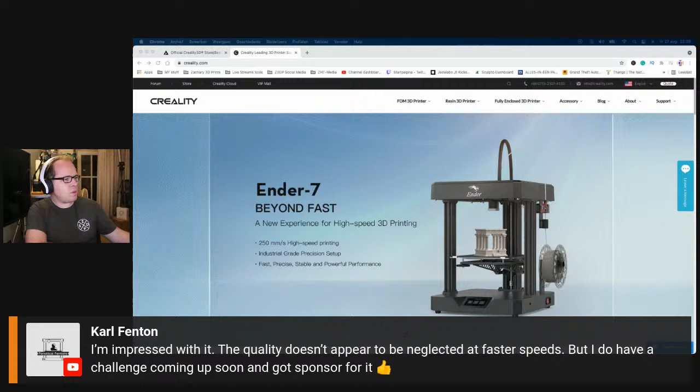I missed something here. Let's put this up. Sorry, let's get back into the firmware. So, supports, downloads, CR series. Just checking on the Ender 6, and the 4, and the 7, and the 6.

I don't understand this. They upgrade, they make some firmware. The latest one is from 6 May. It's only for the screen firmware. So that's not so nice.

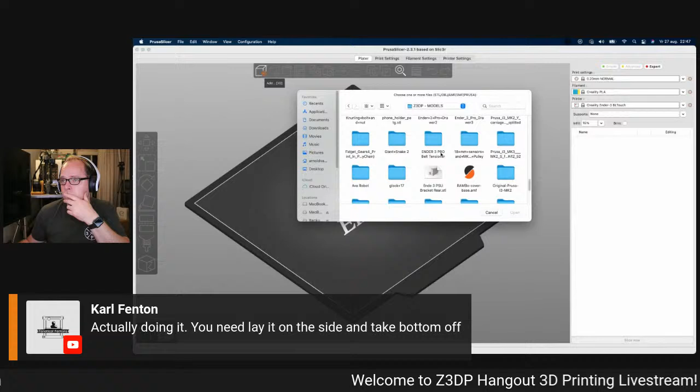So where's this calibration cube, Benchy. Benchy. Auto repair - 1104 errors. Cool.

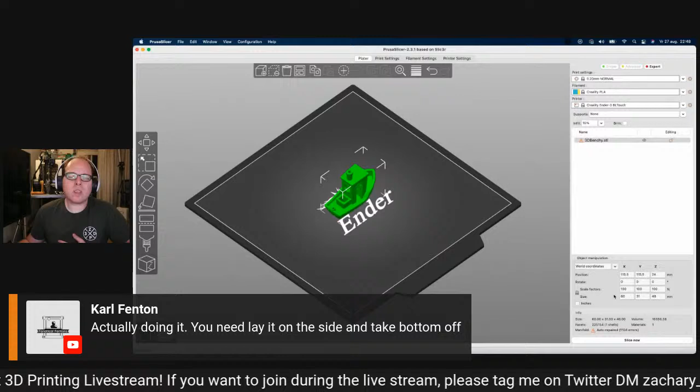A Benchy. So, am I going to use a normal 0.2 layer height on normal? So I want to make the fastest Benchy print. So first I need to make sure to have a brim on, because yeah, indeed there are a lot of errors, but the boat doesn't need to float.

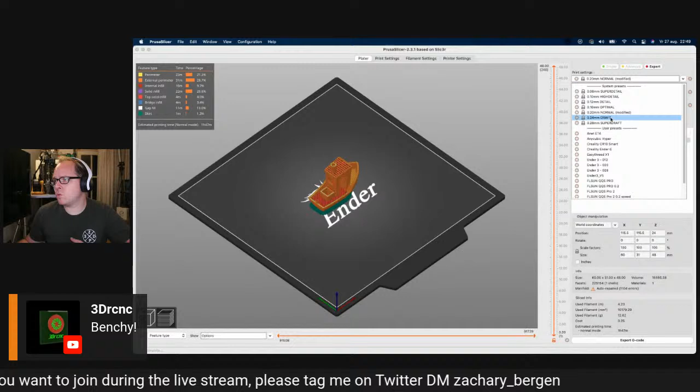Sorry. So if I'm going to slice it now, then it would take me 1 hour and 47 minutes. So, super detail, high detail, detail optimal, normal, draft. No, so I want to have a fast Benchy print. Printer settings.

Just under 4 minutes. You are going to print now in 4 minutes? Print settings. Speed.

Because I selected brim here, brim is skirt and brim are red highlighted, so there's a modification in the quality, normal at 0.2, for under 4 minutes speed record.

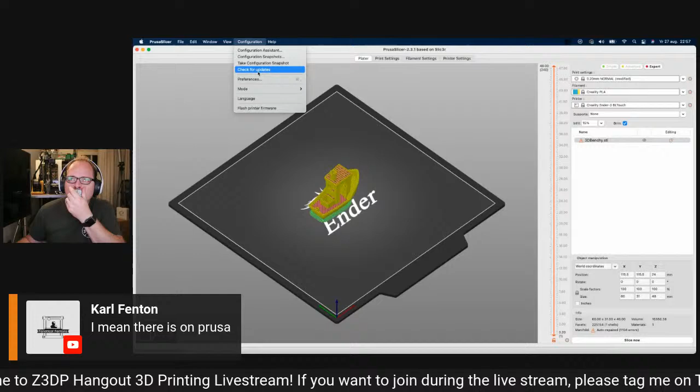Time is relative. Somewhere it's a good morning, somewhere else it's good evening, and in some places it's unknown because we as humans didn't go to Mars yet.

So if I'm... PrusaSlicer says no configuration updates available. Yeah, but I want to know if there's a newer check for updates. So this is 2.3.1.

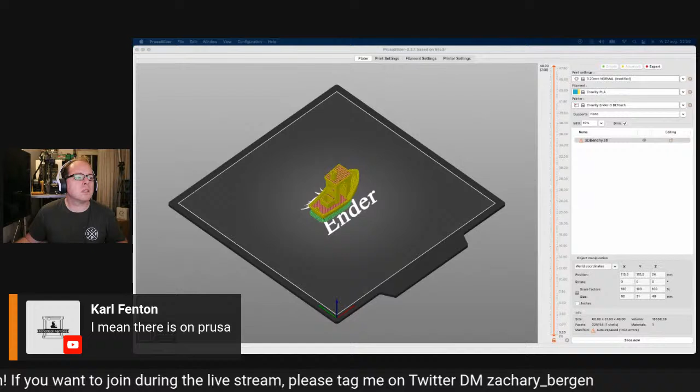3D printer brands, Prusa 3D, software. Oh, software. Drivers, firmware, and manuals. Prusa Slicer. We want to go to Prusa Slicer. Oh, 2.3.3 - that is what I want.

Let's close this one, discard. I don't want to save that. DMG opening. So drag to install.

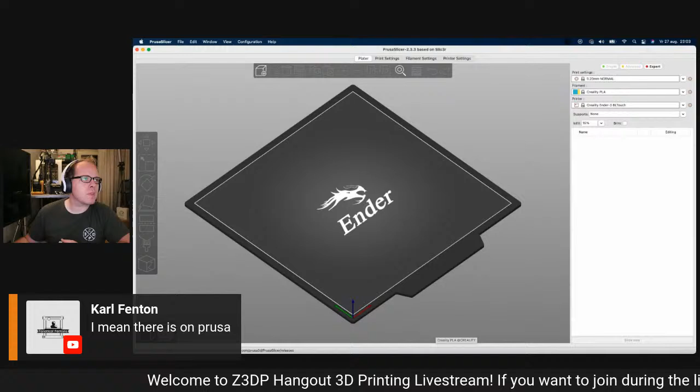Oh, make a Viking. That is insane. Just starting the first prints of your prototype 3D printer.

So we have, I need to check this. Okay, who else had this problem within Prusa Slicer? Just let me know.

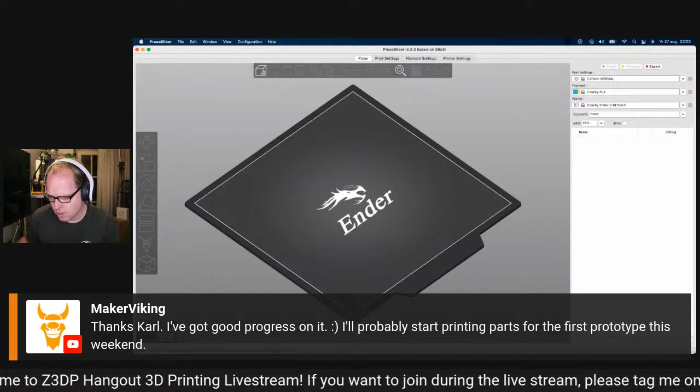So you're going to add another Creality 3D printer. You go into here, you see that these are selected. You're going to deselect it because you are not going to install them again, right? So that is also what I did. I deselected it because I just want to add another printer. I don't want to have those added in there again for the second or third time.

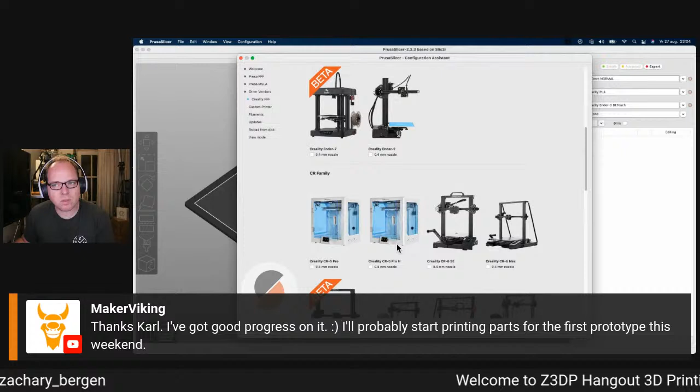So I removed them, and then I was like, hey, Ender 3 profiles. Where are they? That is going to happen if you check these boxes, then those printers will be gone. Makes sense, right? Right. So yeah, the Ender 7 is here as well.

So you are so lucky. Here's the Creality CR-6 Max. We talked about it last Wednesday, 2 days ago.

But what other vendors do they have? I am so very curious. So the FLSun. The thing is, if I am going to deselect this, then my Creality printers are gone too.

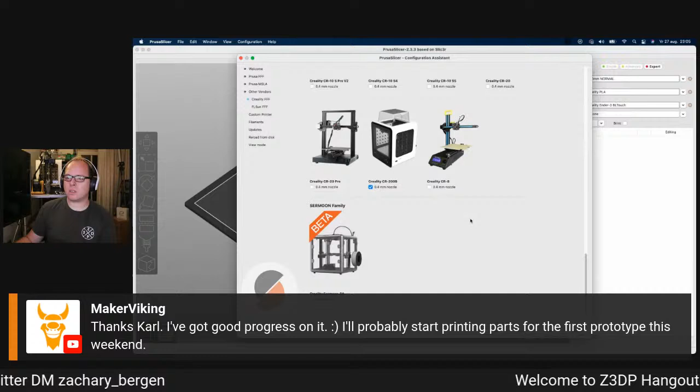Oh, next. Da, Creality Sermoon D1, nice. FLSun QQ-S Pro, very nice. TriLab.

Not me, Zach. I barely use Prusa Slicer. I think you were using more Idea Maker, right?

So, view mode. Okay. So, I'm not going to click on finish because I'm not going to add any other. Yeah, that's what I saw.

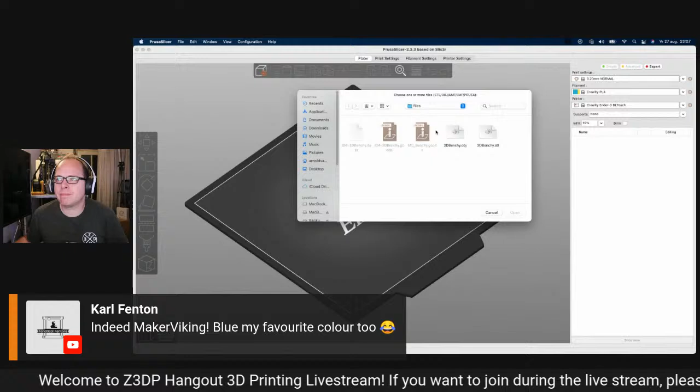Blue is a wonderful color. So again, the Benchy. So nothing changed here, I think.

Auto repair, 1104 errors. Strange, I don't know why, but you know. First slice was 1 hour and 47 minutes. Well, I want, yeah, no, it's going to be set into modified.

So if I'm going to change the print settings, speed, I cannot change anything there. I'm not going to change this. I will do that on the printer. Plater.

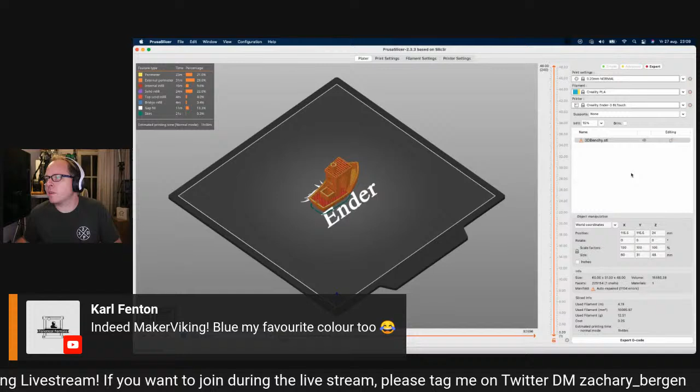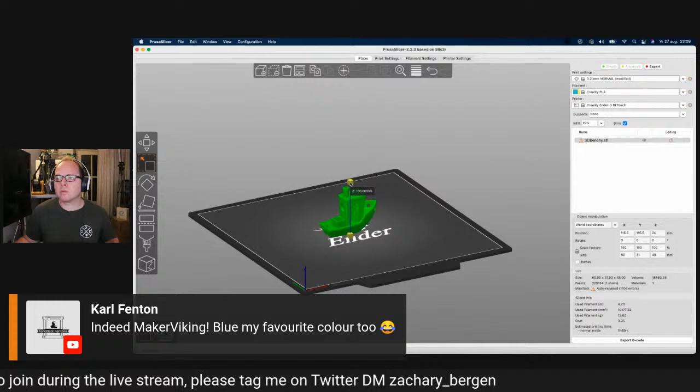No. No. Oh, what am I doing? 50, if I do 50%, it's like no. 29 minutes, so if I go to 30.

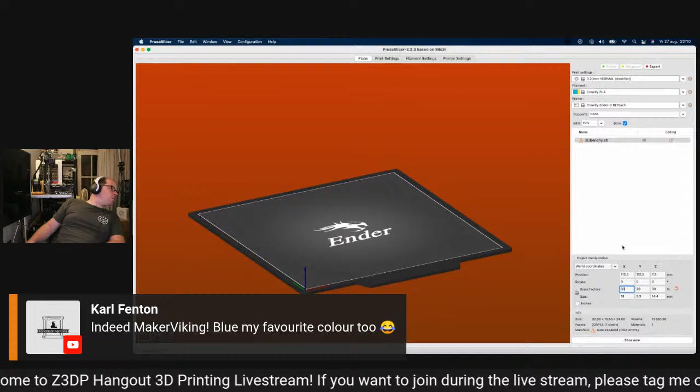Slicing complete. So wait, so if I do 50? Okay, so basically, if I make this 40, so 19 minutes.

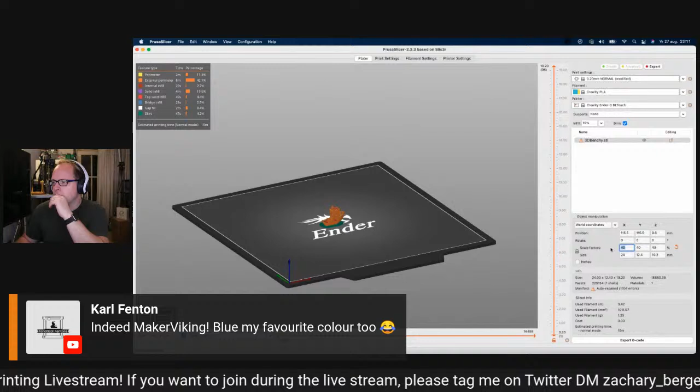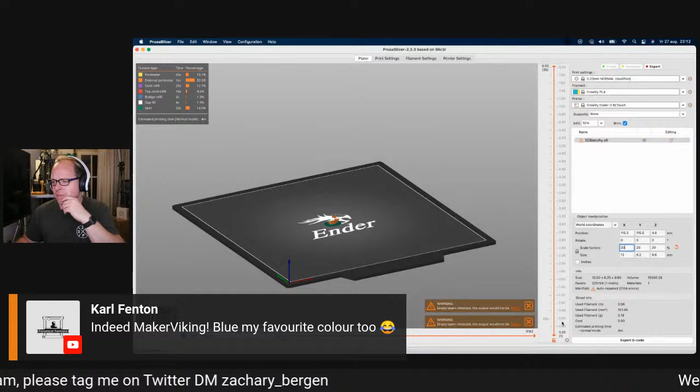So that is real tiny. So if I would manage to get this even sliced, so I have now the problem that it's saying empty layers, and as you can see, the smaller I go, the less things you will see. So...

So no. No. Just undo this. 15.

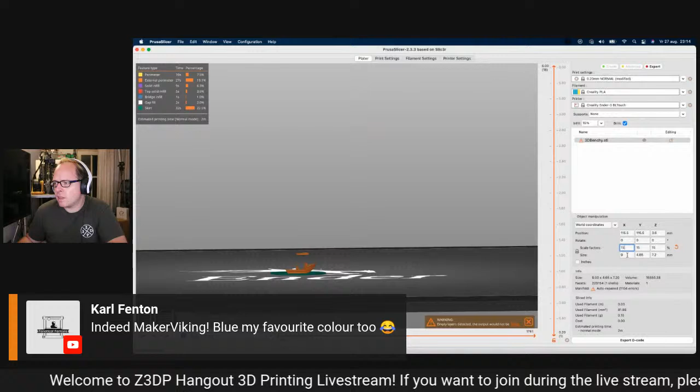So I need to go a little bit bigger. Wait. 2 minutes, so let's go for 20. So 25.

This is usually caused by changing its orientation on the bed. I can do that. Right.

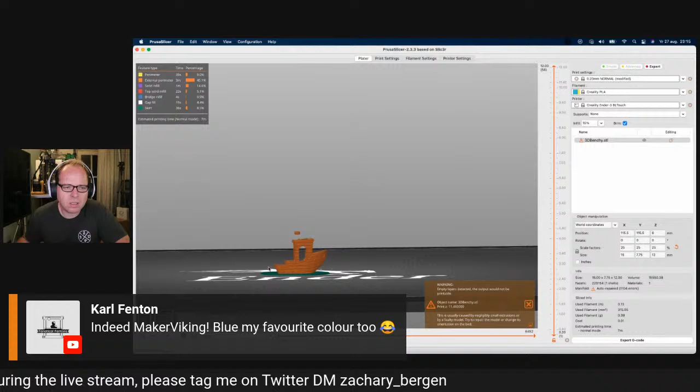No, the small. Yeah, I think that too.

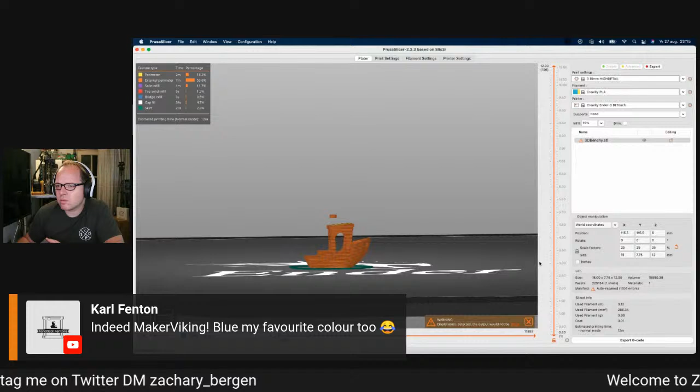Oh, I really would like to try it. But I don't think it's going to look nice. 10 for infill.

How do you use the repair? Never mind.

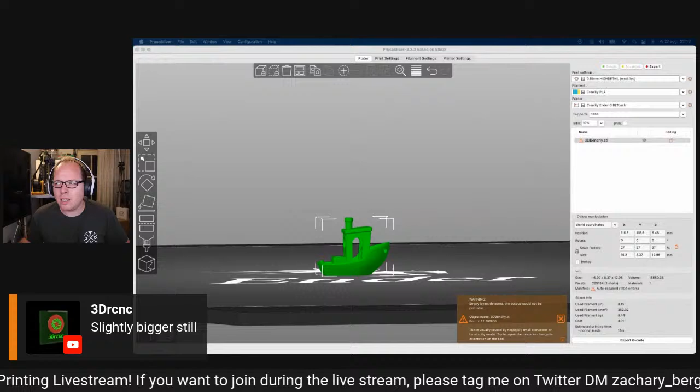Export G-code. So here we have still the issue. I'm just going for 20. Empty layers.

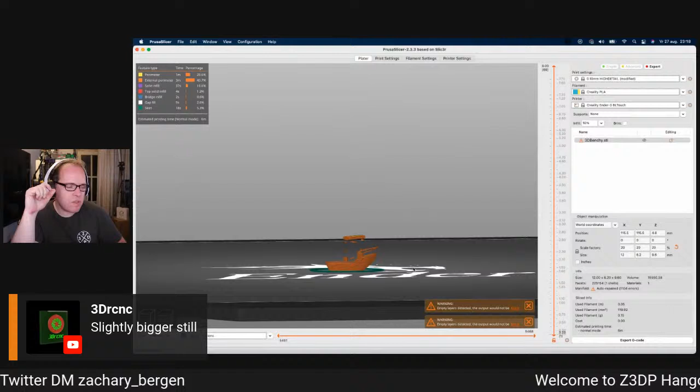I know that I have somewhere nozzles, different kinds of nozzles, and I also think small size, like 0.1, something like that.

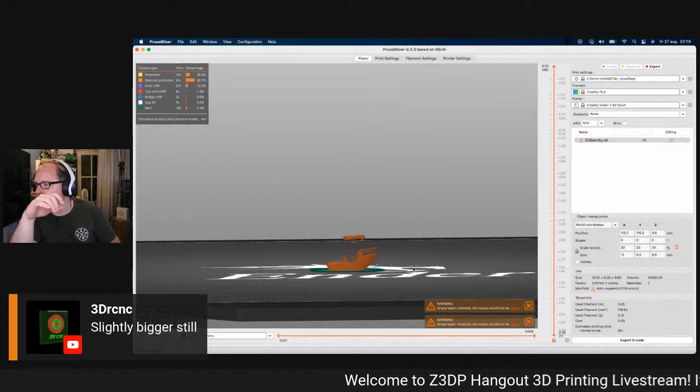So if I would be able to print this, the Benchy would be less than half a centimeter high. No wait, I'm looking at the wrong place. For the height, it's just 1 centimeter high, and in the x-axis it would be 12 millimeters, and the width of the Benchy would be 6 millimeters.

But the thing is, I need to be able to slice it. Maybe if I go to printer settings, extruder, nozzle diameter - if I'm going to change it to 0.2, I do need to think about changing this back afterward.

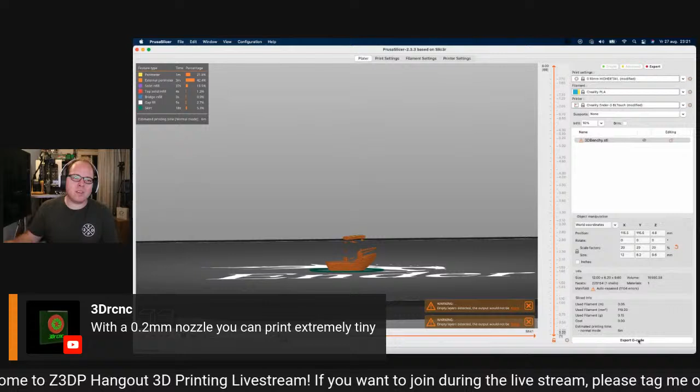If you are wondering what this invisible Benchy is doing on the bed, it's still floating. It's thinking about going a little bit bigger or a little bit smaller, but the smaller I go, the less visible it's going to be.

Zero. Do I need to check if I have those? Does it change the printer settings, layers and parameters? Layer height 0.1, first layer height 0.2. Yeah.

Speed, really fast. Oh, that would also be possible.

Something like that. Then I go a little bit bigger, 30. Slice now. Oh yeah.

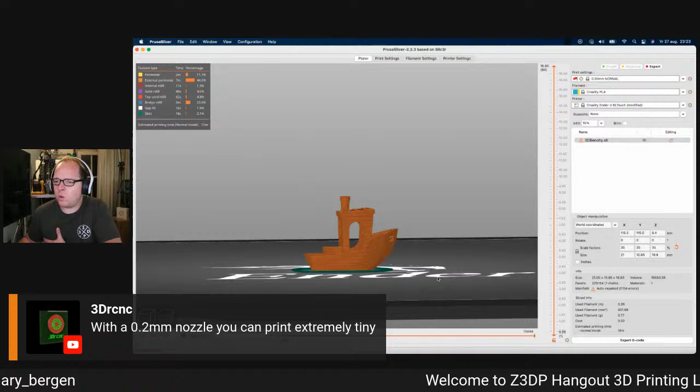This card, slice now. So 35. Slice now. Okay, so there the whole Benchy is there without any issues so far.

Slice now. Printer setting, nozzle is going to be changed to 0.4.

Hey, the boat is gone. It floated away.

So 14 minutes, 14. No, I want to have 80. And first layer is 40 millimeters per second. The rest I'm not sure. Maximum printing speed, auto speed, advanced - what does that mean?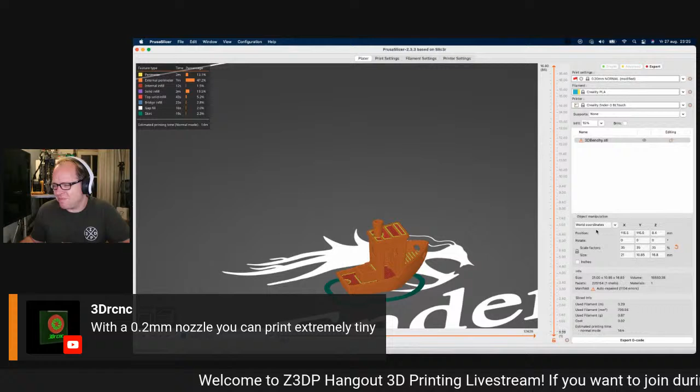I have enough filament there. I'm so - a 3DBenchy printed in a very short time.

It's the first time I printed a Benchy, 2 days ago. Yeah, really, 2 days. I have so many Benchies.

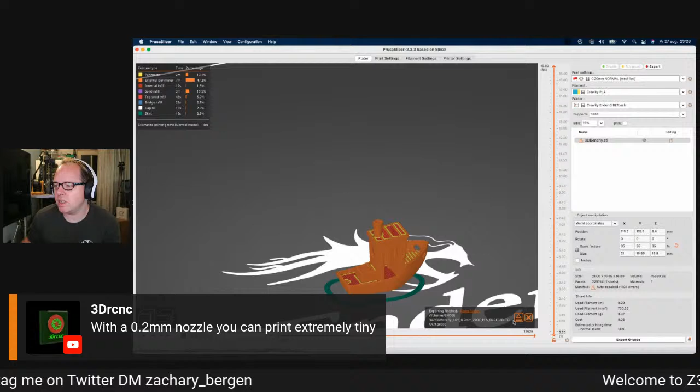So exporting finished. Do I want to do something here? Yeah, I will leave it there, waiting till I get the notification that it is successfully unmounted.

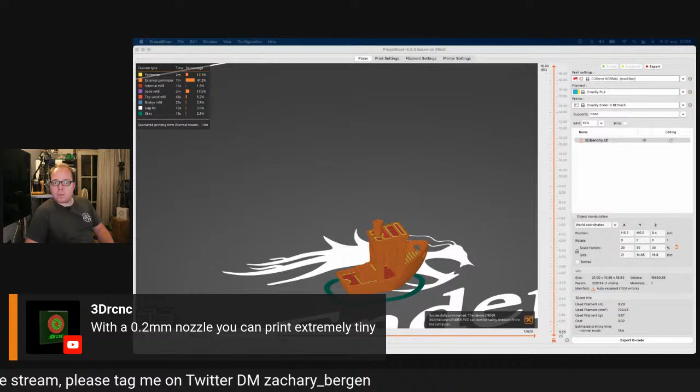So let's fire up the printer and see what is going to happen. 14 minutes.

So let's make some light. Wait. Wait.

3 current viewers? Really? Okay.

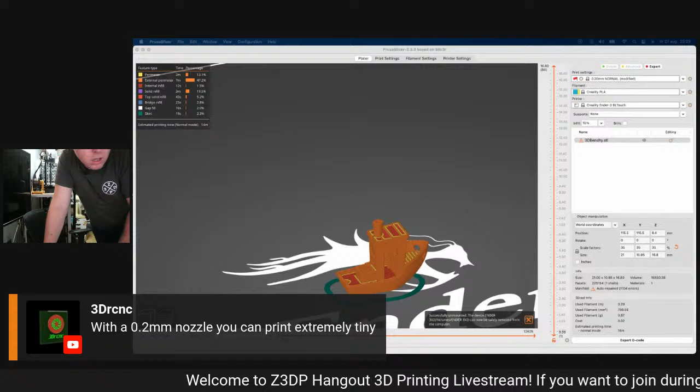So I'm going to heat up the printer. So this is the profile from the Ender 3 Pro V2.

Yeah, I need to vacuum clean here.

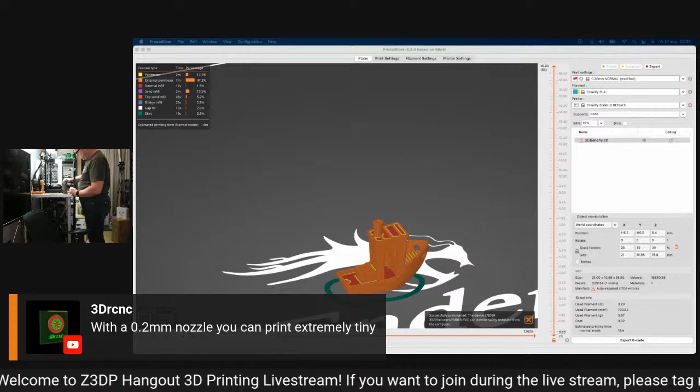Who's still in the chat? Because I don't see that much people. Prepare, preheat - so we are going to preheat with the temperature for PLA. Okay.

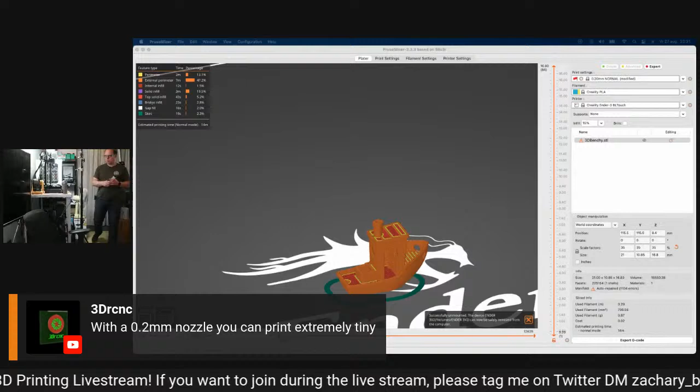This will be interesting as well. Yes.

Burn the wheels off, wow. That could be possible.

So who's all in the chat? Because YouTube says there are only 3 people watching. So Anna, 3D Chris, I think Carl is also still there, so that makes 4. I know buddy, I know. Oh, current viewers too, more people left.

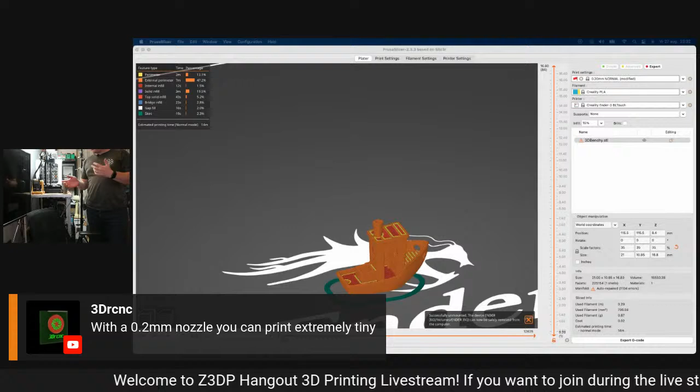I'm going to do a 3D speed Benchy. But the funny thing is, I'm scaling down a Benchy to print it fast on a big printer. Makes no sense, right?

Beep, beep, beep, beep, beep, beep, beep. Press apply. Bum, bum, bum, bum, bum, bum, bum, bum. Whoop. Something like that. So, then it smells a little bit like cherry. Sorry.

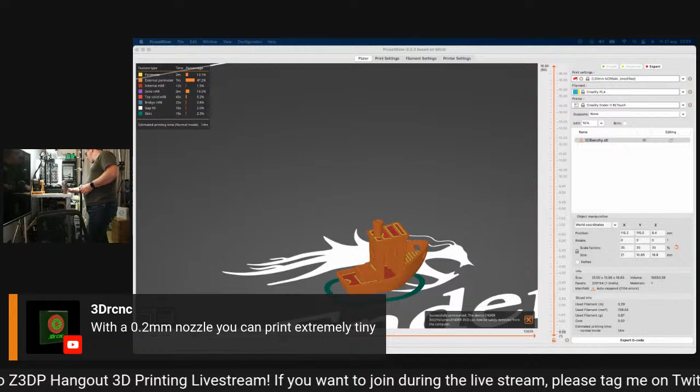Down. Tools, move axis.

Oh, that's a good idea. Yeah. Yeah, 3 people.

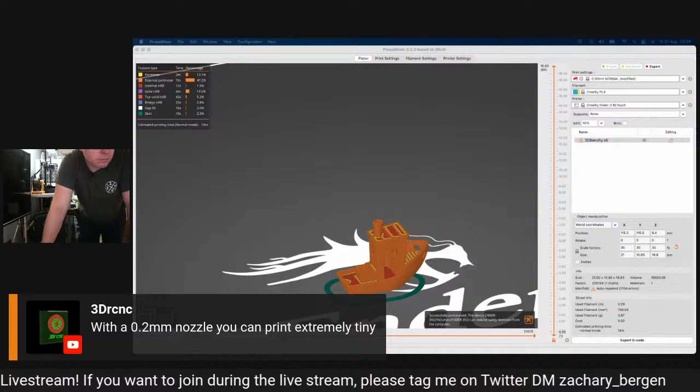And so it's also the same for Streamyard, but that I'm not going to refresh. Print, Benchy.

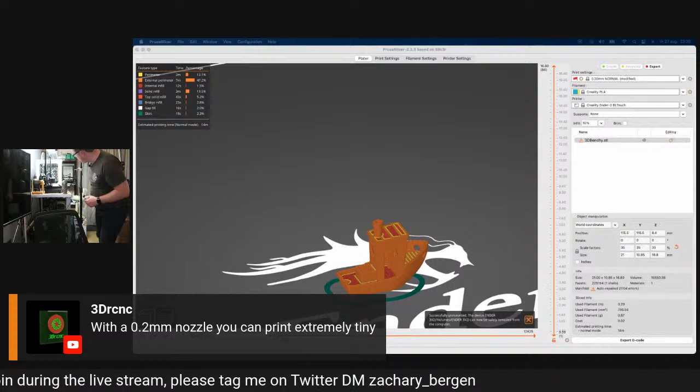So it did do homing. So print. So first we are getting the ABL process, procedure, process thing, no. I don't know what you're thinking. So I go out for a little help.

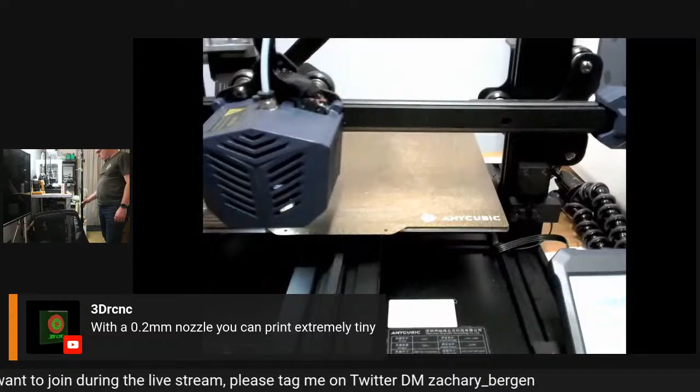Yeah, the webcam isn't that great. Well, we know that, it's a cheap webcam. Still was quite expensive though.

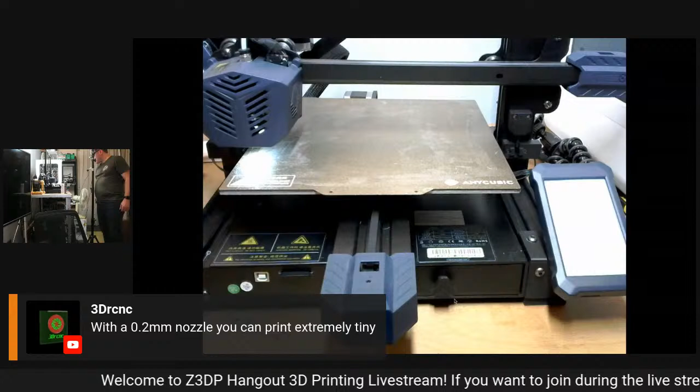So I need to take a stopwatch. And what I'm also going to do is see if I can do something with the print rate. Is that the print rate? Why do they call it print rate anyways?

That will work. Ah yeah. The time is also only 34 minutes streaming for me, it's 1 hour and 36 minutes streaming.

I do need to say the profile from the Ender 3 BLTouch isn't as perfect as you would expect. This is the profile that I use on the Anycubic Vyper. But I do need to say Prusa Slicer for the ABL probing does amazing. It's under 50 degrees, not at the melting point for the PLA in this case, so you don't get those little tiny dots on the bed that you would get if you are heating it up to 210 degrees. Because I did that, and every single time you would see those little pointy things on the bed.

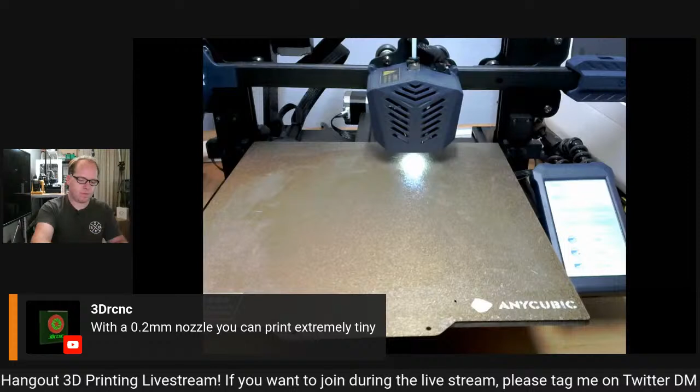Streamyard told me it's showtime, so I started the countdown. I do need to say it's a very nice song. So, stopwatch, I'm going to set my timer.

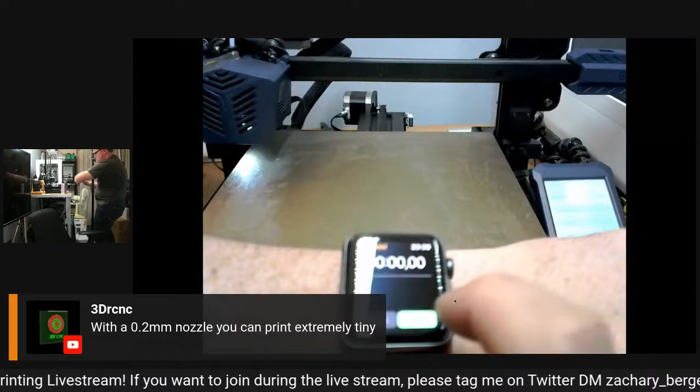So it's starting to print. Now it's going to heat up. Yeah, it's heating up, I was like come on, come on, come on, come on. So it's heating up now, almost there.

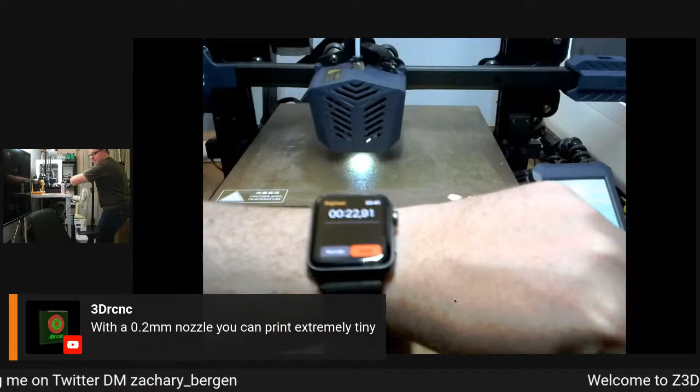So I'm also going to try if it would be able, if I can. So no, wait, stop, new settings.

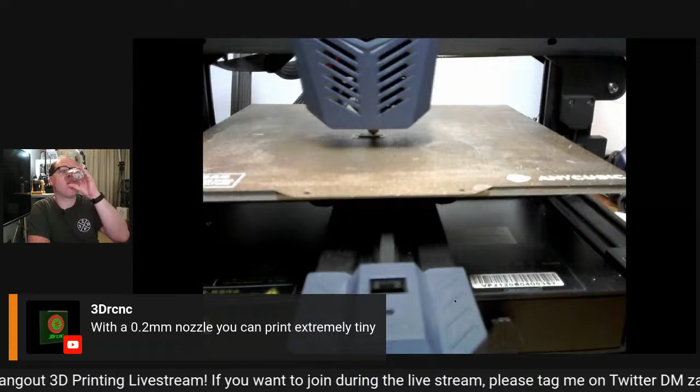How about you? If this one succeeds, I'm going to print another one but try to increase the speed on the printer itself. But first I want to see how the quality is on this one.

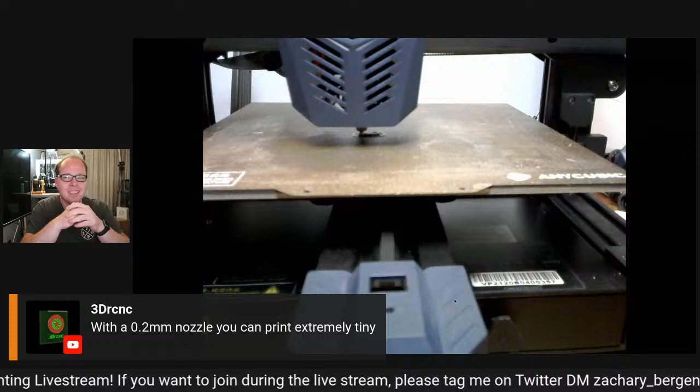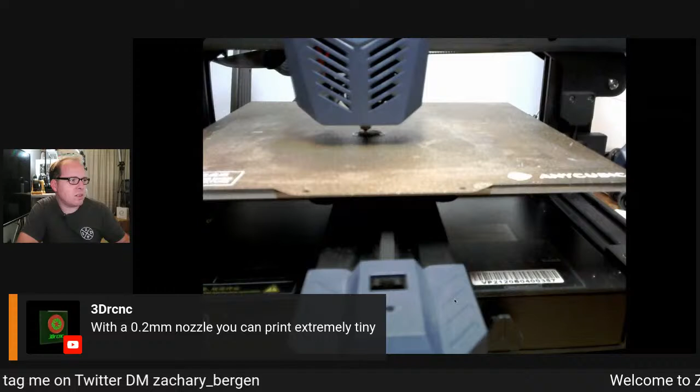Just asking for the blob monster if it comes off. The blob monster? Ah, it's a PEI sheet, so yeah, just flexes right off. Oh, sometimes I don't use socks as well. No, I don't use socks.

So at this moment we are 3 minutes and 15 seconds into the printing. It's now printing the cabin and the deck, so that looks nice.

So Kieran, how are you doing sir? How's Down Under? It's a full-size Banshee, but small. It's at 30%.

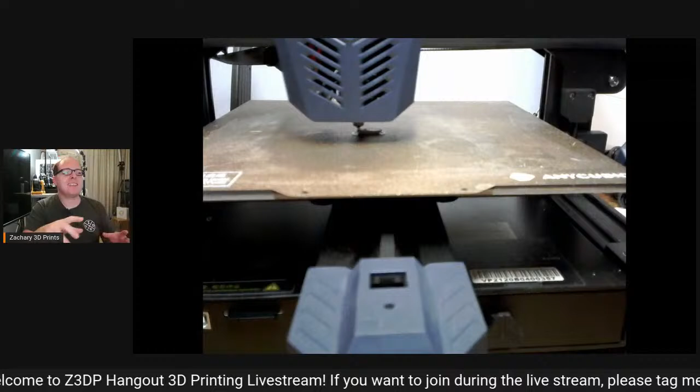So it's officially 1/3 of the original size. No, when this print... that is the cool thing with reviews on 3D printers. If it looks bad you're not going to show it, if it looks perfect you are going to show it. No. But this is cool, if this print looks okay-ish I would feature it in the review video.

Yeah, something like a 0.2 millimeter nozzle, printing a Banshee a third of its original size, and it does look nice, still looks like... So I did cross the 4 minutes, it's now 5 minutes, but still a fast Banshee. It's printing the bow now.

I thought the build plate was massive. No, I just lowered the camera arm. Oh really, I did not say that right? Nobody heard that. I lowered the camera boom here, a little bit, so that everybody can see how this huge, massive fan shroud is shadowing the little tiny Banshee.

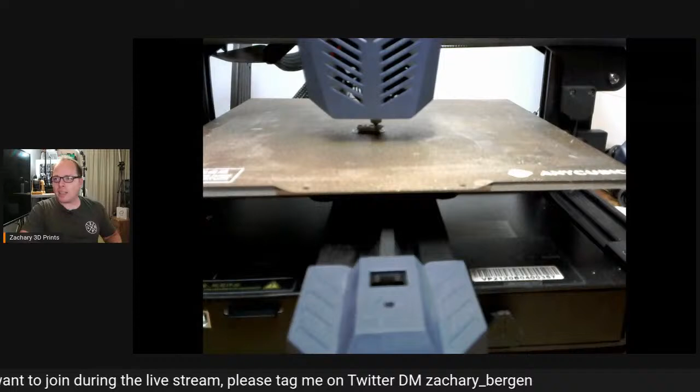Oh, it's printing the cabin as well. I am so pumped about this. Oh my gosh. Sorry.

I need to tweet this out. Just let it go, let it go, don't hold it back anymore.

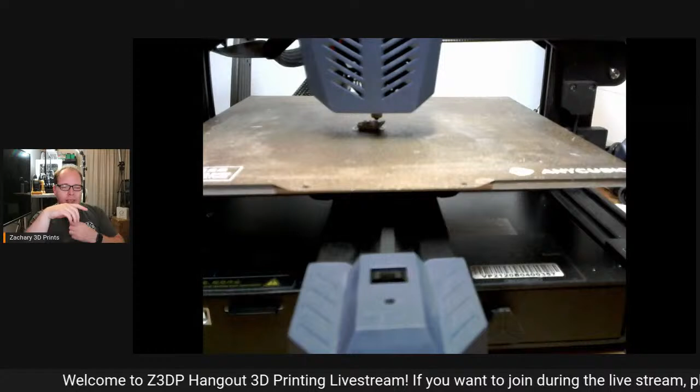I would be a guy that's... I could use socks with sandals to form more scandals, I guess. But seriously, I'm using sandals, but just barefoot, no socks.

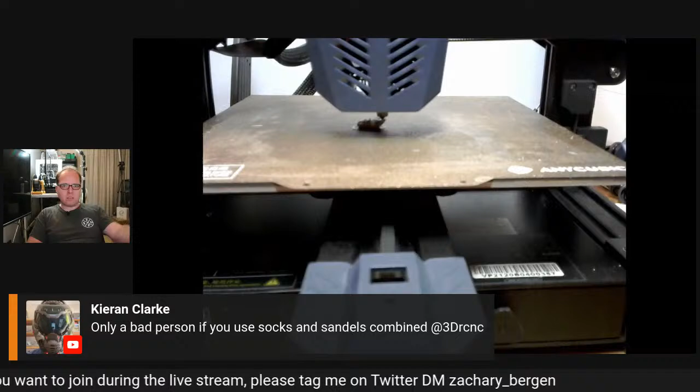I'm going to grab something to drink. In the meantime, 8 minutes and 50 seconds into the printing.

I've got here little Antarctica in my fridge.

I am so curious about the result. Oh my gosh.

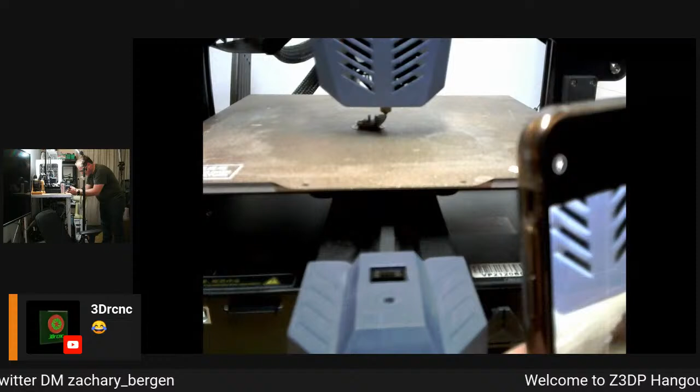I think the minimum layer time makes it slower than Slicer predicted. The official print time is 4 minutes in total, and it's now almost at the top of the cabin.

Don't follow me, don't follow me. Oh, yay.

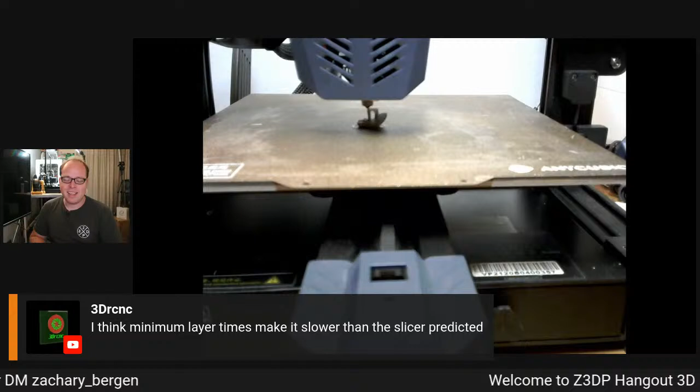Yeah, it's bridging. No, I wanted to go under the 4 minutes, but I didn't know how the result was going to look like, you know?

Oh my gosh. You know, doing something like this is really enjoyable to watch, you know? How small can I print on an FDM machine? We all know that if you are doing resin printing you can go even like a 2-3 millimeter benchy, you know? Three-minute benchy? 3 millimeter benchy?

I will have to try this tomorrow. I don't need to say, because it's tiny, things are getting also tiny, so the walls are not the strongest.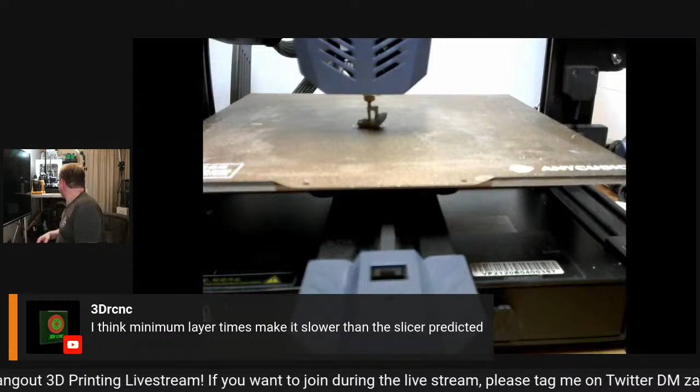So, 13 minutes and 7 seconds.

Since the model is very brittle, you need to be careful not to take it off by hand.

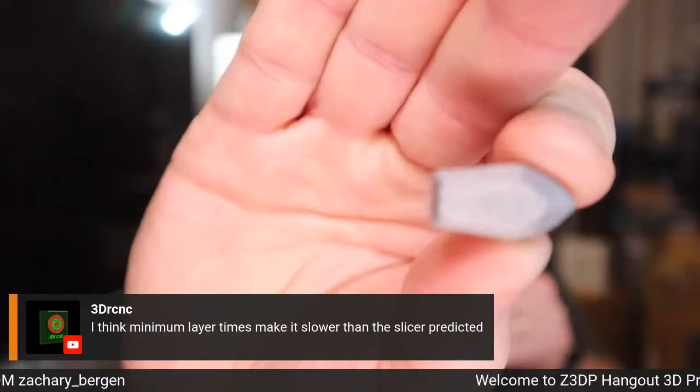Hey, Astro Printer! Here's the back. For the size, FDM printer, it's not bad at all. I have some stringing, so maybe the nozzle is too hot? You know the text on the bottom? If you look in real life, it's better visible, but you can still see it. Also, the tiny hole that is here.

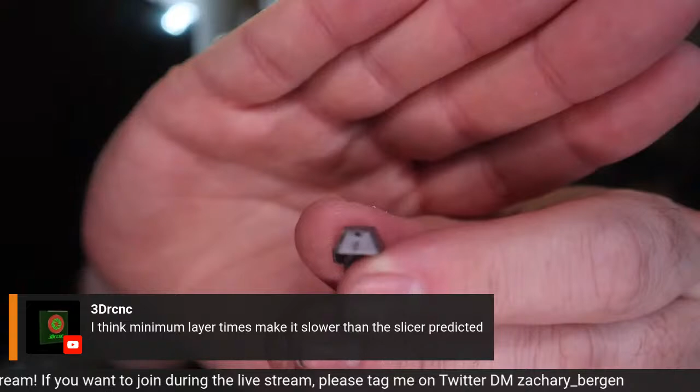Oh my gosh, I have it upside down. It's not bad. This is insane, yeah true. I have some stringing issues. The fire stack, or the smoke stack, it's a little bit of a blob, but then think about it, this is 1/3 of the original size.

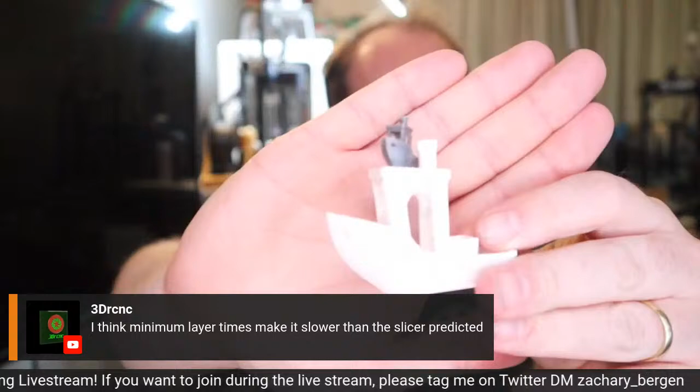That was fun, that was fun. So...

Looks like it needs more cooling. Yeah, but this was printed on a normal FDM 3D printer, a 0.4 millimeter nozzle, not even a 0.1 millimeter nozzle. So I think when you use a 0.1 millimeter nozzle, you will get better results. But this was a fun thing to do. Can I get a Benchy out of my FDM 3D printer with normal standard material and see how small I can go? I'm going to put this on Twitter, hashtag smallest Benchy, and see if I can also do something else, instead of a speedboat Benchy. Hashtag smallest Benchy FDM, something like that.